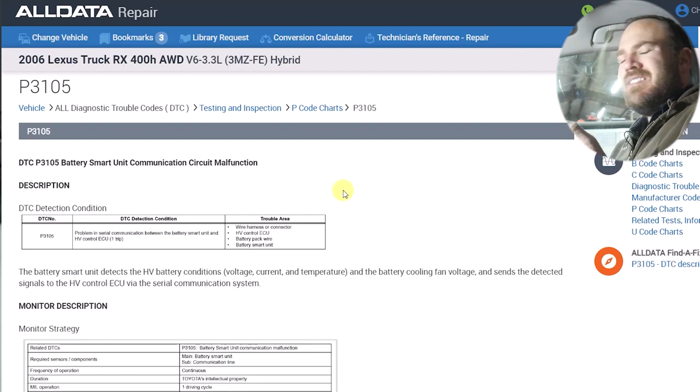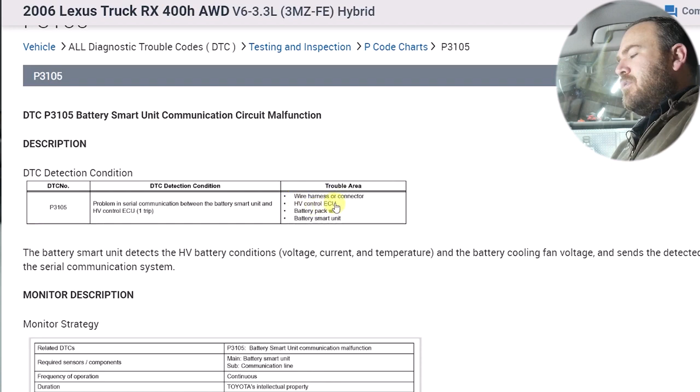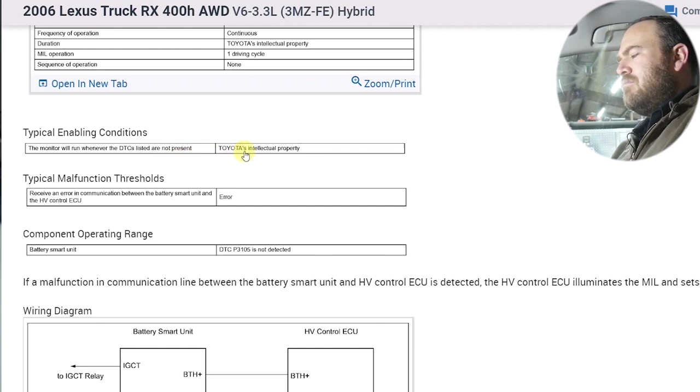So I have the 2006 Lexus RX400 pulled up on ALLDATA, and we're going to see what the code set criteria is and what the possibilities are. P3105: problem in serial communication between battery smart unit and high voltage control ECU. Trouble area: wiring harness or connector, HV control unit, battery pack wire, battery smart unit. Typical enabling conditions: the monitor will run whenever the DTCs are not present. And the rest of it's Toyota's intellectual property—they're not going to share that, even with their own technicians. So it's going to give us a quick

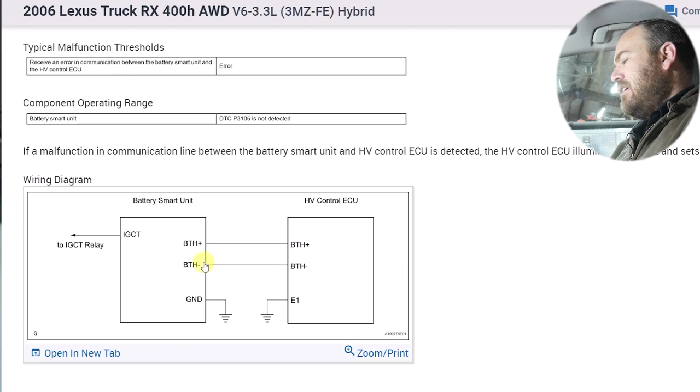rundown of the wiring, just a basic communication network here. And it looks like we do have a high and a low, so this is more like a CAN network and not just a single wire serial network or a K line. So we have BTH plus, BTH minus, and it goes from the battery smart unit to the HV control ECU. Now the HV control ECU is behind the glove box, so you can access that without getting close to the high voltage system. And then if you are working with the battery pack anyways, this battery smart unit is behind the seats.

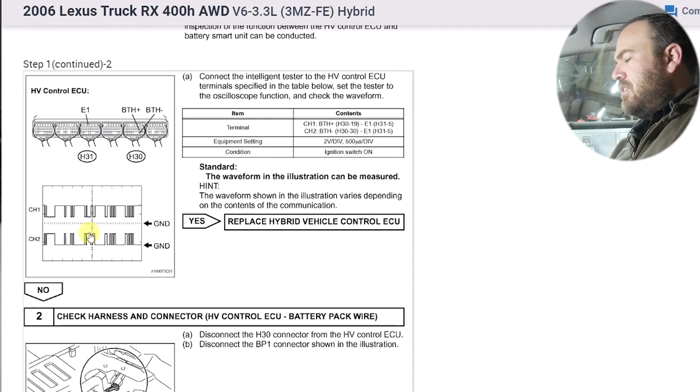So you're going to want to scope those communication lines and see if there's any issues. Now, they will show you here's the high voltage ECU behind the glove box, and they show you what the network should look like. Let's see if I can zoom in on that for us. So it looks like a typical CAN network. We have one switching high, one switching low.

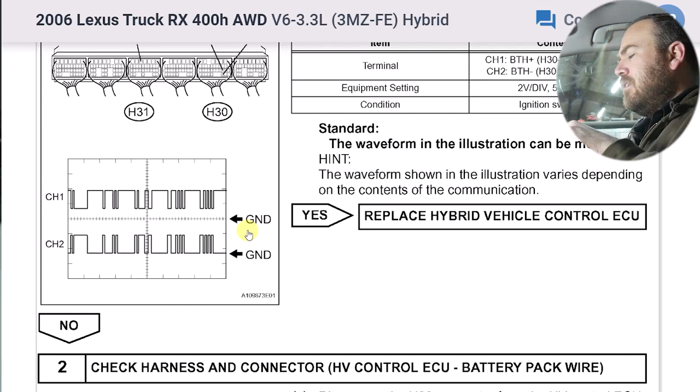I don't know what the bias is on this, if it starts at 2.5 and goes to half a volt, or if it's a 12 volt square wave. It doesn't really say, but it says that we should be at 2 volts per division and 500 microseconds on our lab scope.

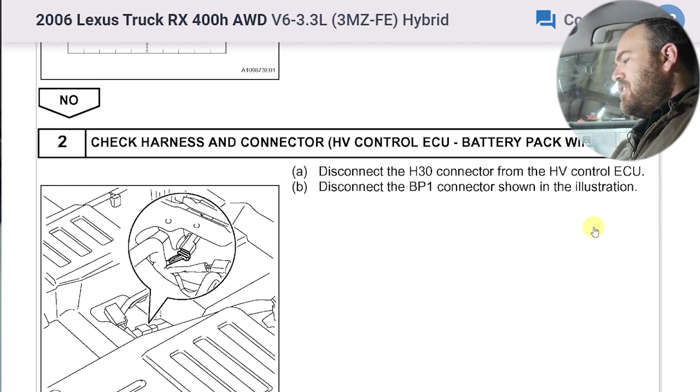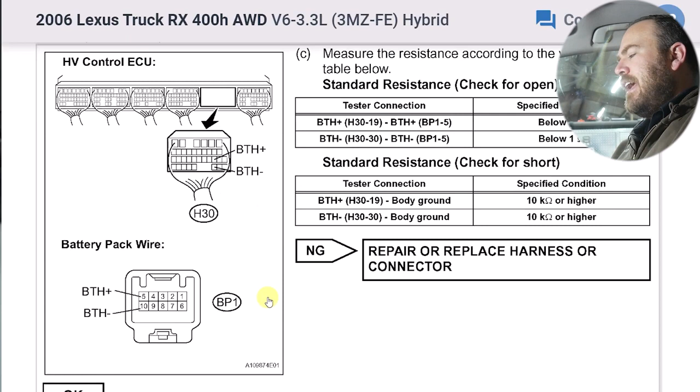So then it tells us that we should check the harness and connector to the HV control ECU to the battery pack wire. Disconnect those wires. Disconnect these wires so you can access even with the battery cover on at the back. And they want you to do resistance checks on those communication wires. And it goes on and on and on.

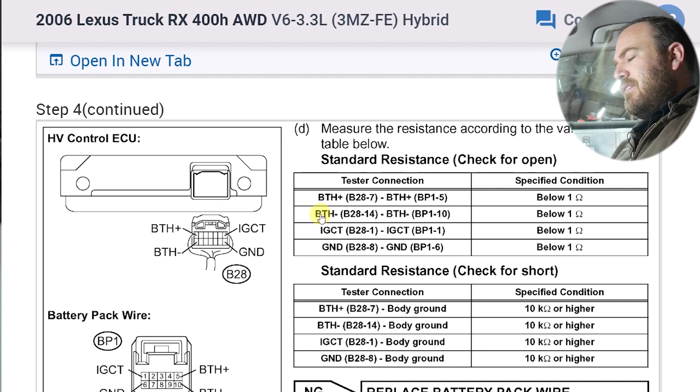Now, I did all this last time it was in here. Everything tested good. He didn't have a problem for 12,000 miles, and then it came back on again.

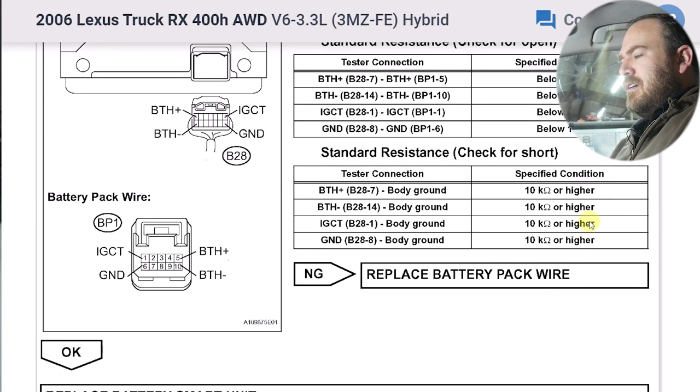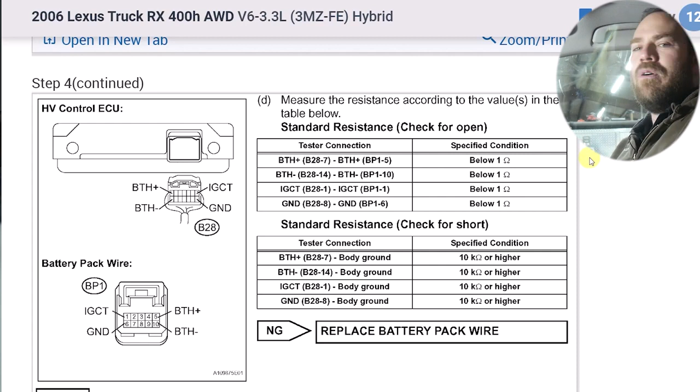So I started doing some more digging, doing some Googling, and I found a video from Diagnose Dan. And in that video he mentions a service bulletin. Now he's mentioning a service bulletin that's from DDTSB, which I believe is his own network of service bulletins. So I don't know if it's an official service bulletin or if it's one that he has created, kind of like on Identifix, how they have their Identifix articles.

I have checked this code on Identifix and nothing comes up. I've checked it on ProDemand and nothing comes up.

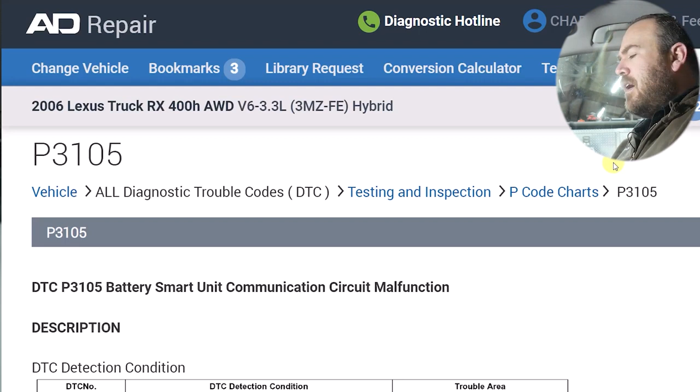And then I also saw a video from Super Mario Auto Diagnostic. Now he was pulling up service data from, he was working on a Toyota Highlander. His service data didn't look the same as my service data. So I pulled up a Highlander this morning. I looked up a 2006 Toyota Highlander hybrid. Exact same chassis, same power plant, just a different body.

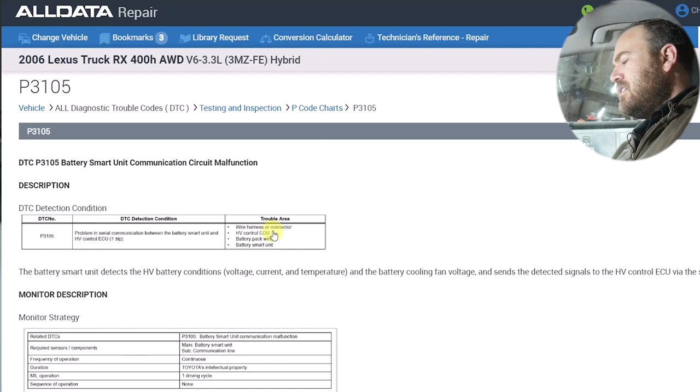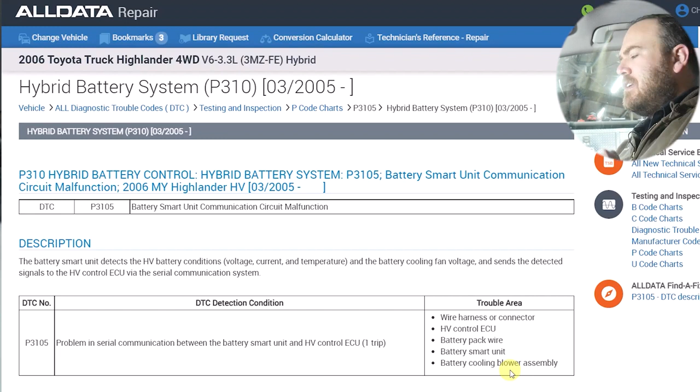This information is different. Let me go back to the top of this page. So we have wiring harness connector, high voltage control ECU, battery pack wire, battery smart unit. If we go to the Highlander, we have wiring harness connector, high voltage control, battery pack wire, battery smart unit, battery cooling blower assembly. Why would that be added to the Toyota one and not to the Lexus one?

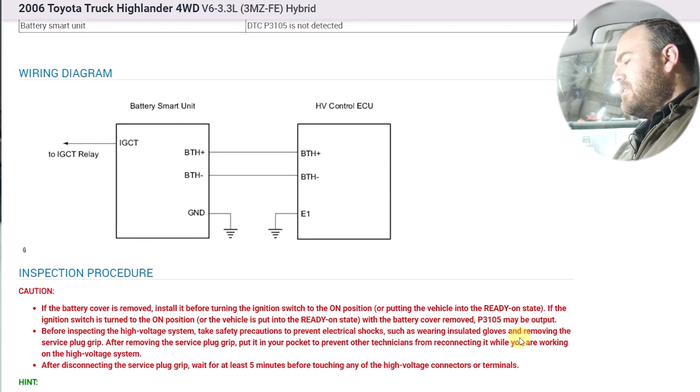Well, let's scroll down here a little bit. They give us, most of this is the same information. Step 1 on the Lexus is to inspect the control ECU and look at the network. Let's go back to the Highlander. Procedure 1, same thing. Look at the waveform.

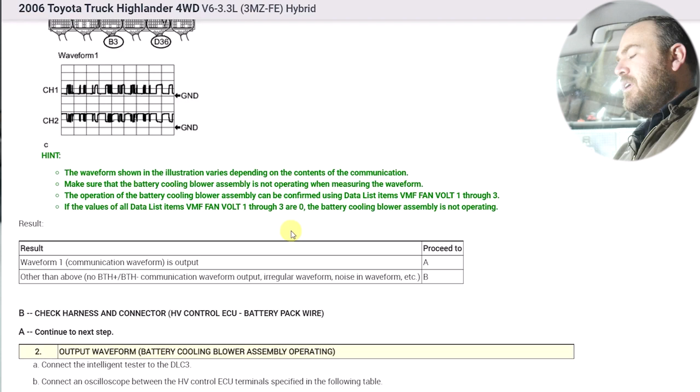And then there is a hint right here. The waveform shown in the illustration varies depending on the contents of communication. Make sure that the battery cooling blower assembly is not operating when measuring the waveform. The operation of the battery cooling assembly can be confirmed by using data list items VMF fan volt 1 through 3. If the values of all data items VMF fan volt 1 through 3 are 0, the battery cooling fan assemblies are not operating. So they want you to check for noise in that communication network with the fans turned off.

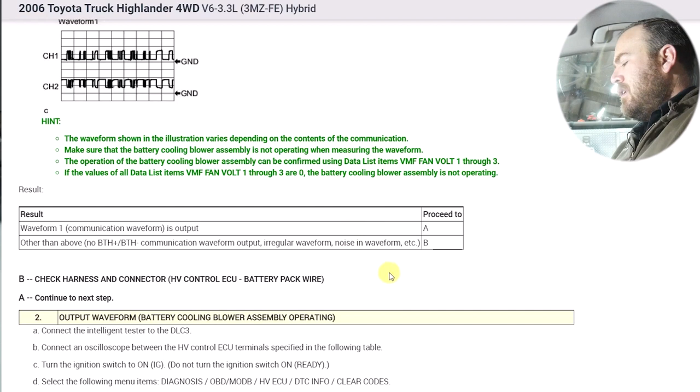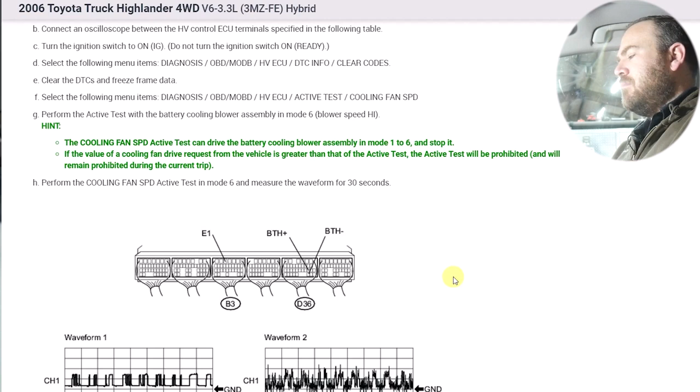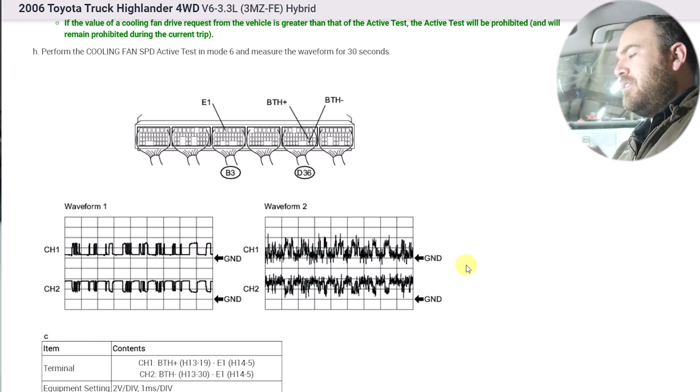Next step is to connect your service tool, and they want you to command the blower speed to maximum, mode number 6. Now that's not to be confused with OBD mode 6, they just want 6 because that's the highest it goes to on the scan tool. And we're going to do this here in a minute. They want you to look at waveform 1 or 2. If you end up with waveform 2, then likely your cooling fans are bad.

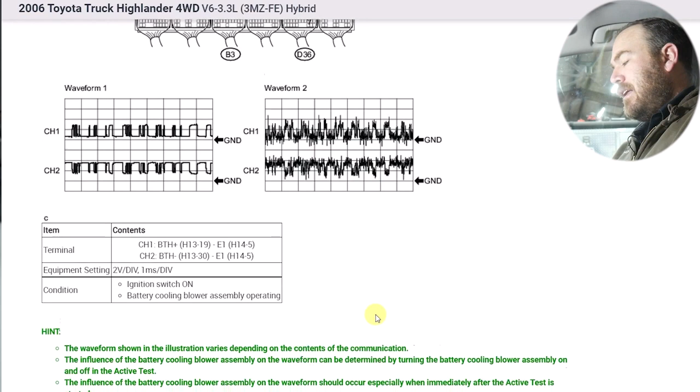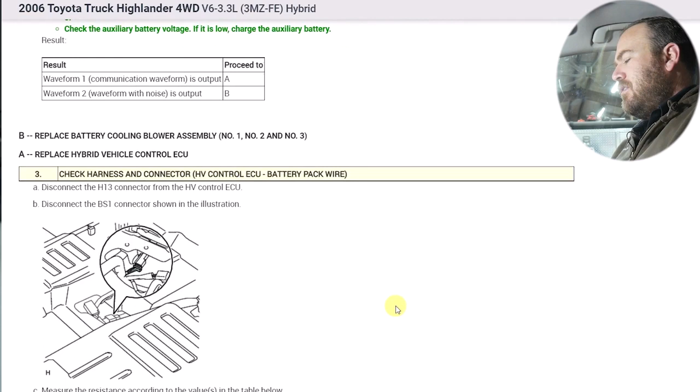Now, if I had this information the first time I looked at this vehicle, I could have potentially fixed it. And instead of sending the customer away and him driving for another 12,000 miles until it acted up again, we could have resolved the issue. We were already down to the battery pack. So I'm a little frustrated that the service information differs.

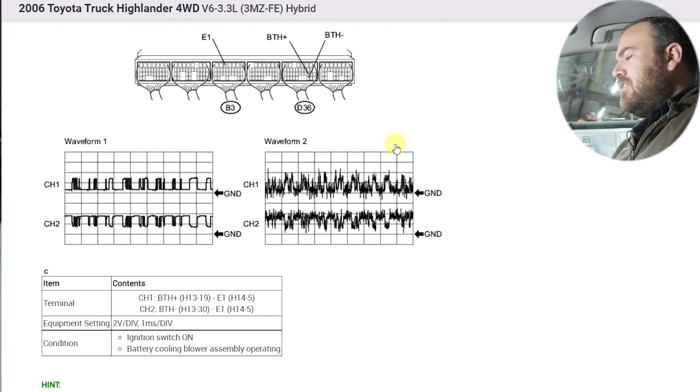So let's go ahead and do this. We are going to scope the communication lines. Now, since I already have the battery cover off, which I'm not going to show all that, there's a lot of safety aspects. You should be trained if you're working on the high voltage system in the back.

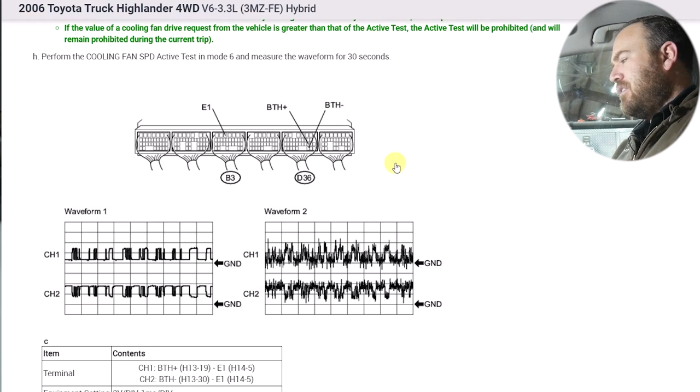I'm not saying that a DIY cannot do this job safely, but you've got to take a lot of precautions. You have to make sure that you're staying safe. Read all the information in the service manual pertaining to the job and how to do it safely. So let's go ahead and put the laptop down.

We are going to use the Launch Torque 5 today, I believe that's what this one is. This unit has an oscilloscope and multimeter built into the VCI. I have the VCI connected to the data link connector. It is wireless, so I plugged it in and it identified the vehicle.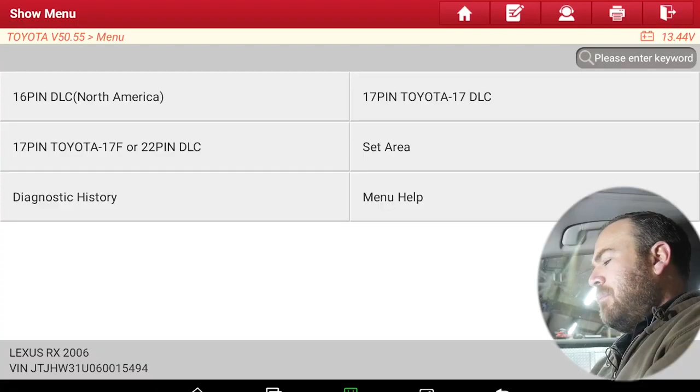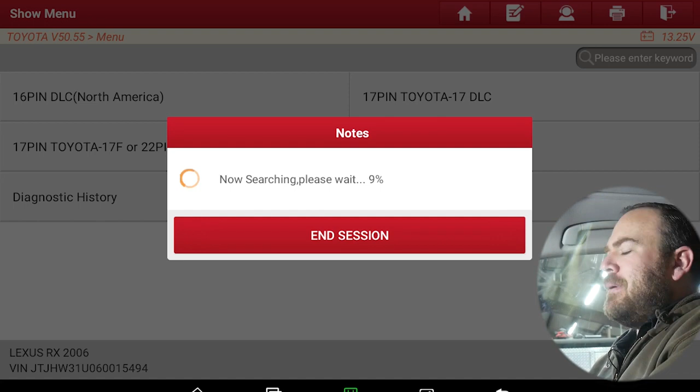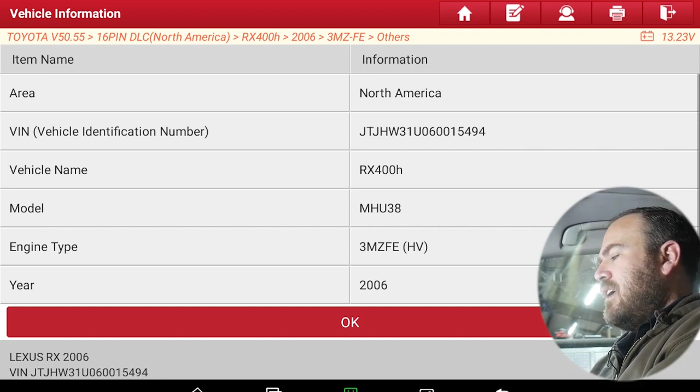We're going to go 16-pin DLC North America. If you're in a different region, on the screen there's a button called Set Area. You click that and pick the area that you're in. By default, these don't come shipped with USA or North America as the region. So the first time I used a Launch scan tool and couldn't communicate with a Toyota, I thought I had an issue, and it was just that I wasn't selected to North America.

So it has the topology screen. We show CAN 1 and our K line, so we have a serial network and a CAN network. Now that network for our battery observation module is not on this network. That is a direct communication from the high voltage ECU to the battery.

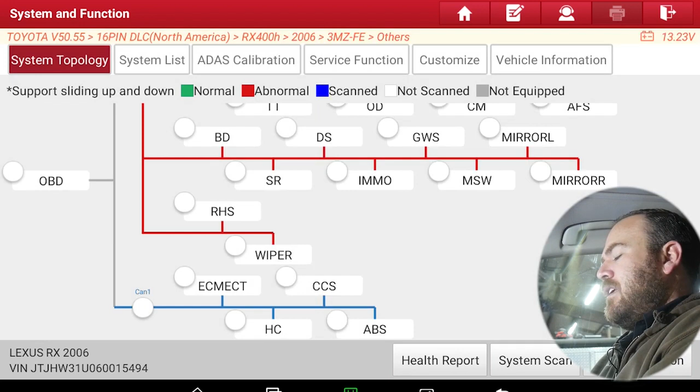Now I'm going to have a million codes in here. I'm just going to jump right into the hybrid controller, because that's where our testing is going to be for those cooling fans. And I do have the service plug out. I have the hybrid system disabled, but on this particular vehicle I can still communicate and command the fans on. And if you look at my voltage at the top, that's 13.24 - I do have a battery maintainer installed.

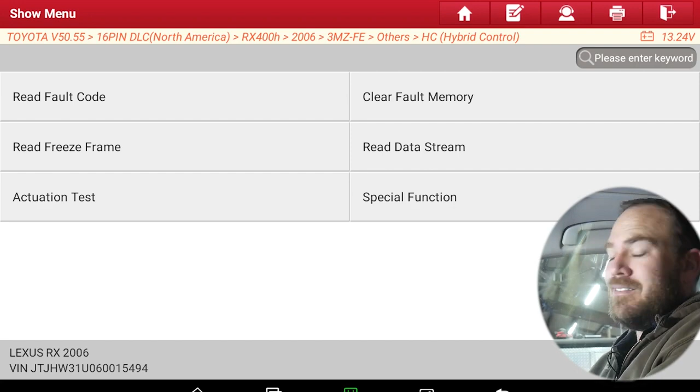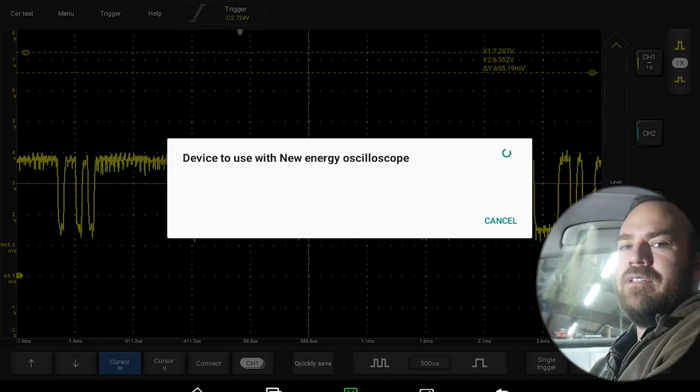So before I actuate this, let's go ahead and switch back to our lab scope and see what our signal looks like. On this unit, even if you're plugged into the data link connector and you want to use the lab scope wirelessly, there's a power button on the top. You hold that power button and wait for it to connect wirelessly. So that's what we're going to do.

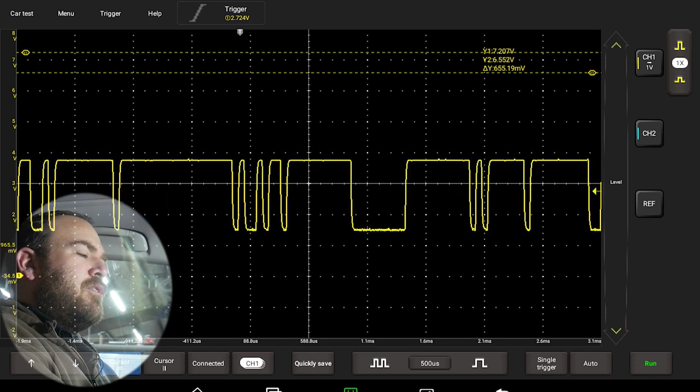I'm still new to this scan tool, so if I make mistakes in the operation it's just because, you know, I'm not an Android user and I'm new to the Launch lab scope. This lab scope seems more like a scientific lab scope to me in operation, more like what an electrical engineer would use based on the triggering and the setup. It's not quite what I'm used to using, so there's a bit of a learning curve. But you can do triggers, measurements, and all that.

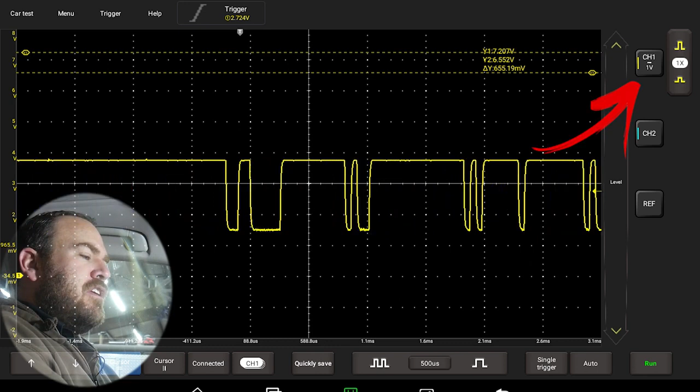So I have channel 1 on 1 volt per division. Now they wanted 2 volts, but it looks like we have an adequate waveform here at 1 volt. Now I'm going to turn on channel 2. We need to set that the same. And we have our CAN, or communication high and low, networks here.

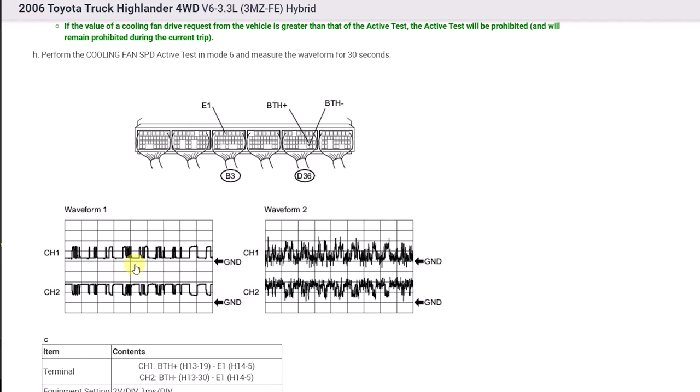Now they look pretty good. If we look back to our service information on the laptop, it looks pretty similar to what they have on waveform number 1. Now their images are a little smaller because they're using that 2 volt per division, and Toyota doesn't normally give the highest resolution images for their known good waveforms.

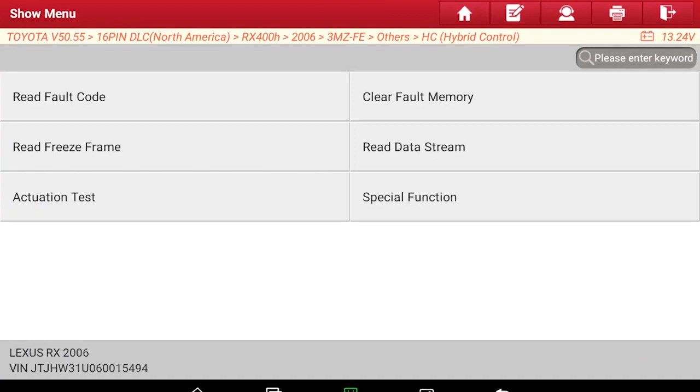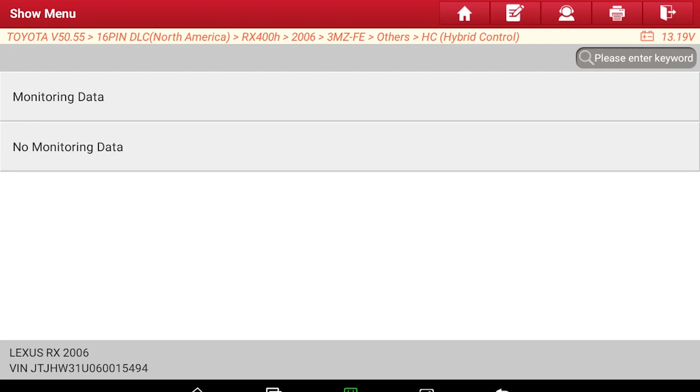So let's switch tabs here. We're going to go back to the Launch app for the scan tool. We're going to go to actuation test, drive the battery cooling fan. Now it said that we should go to test mode number 6, so we'll hit number 6.

We're going to switch back. And our waveform is getting pretty nasty. I can hear the fans ramping up in the back.

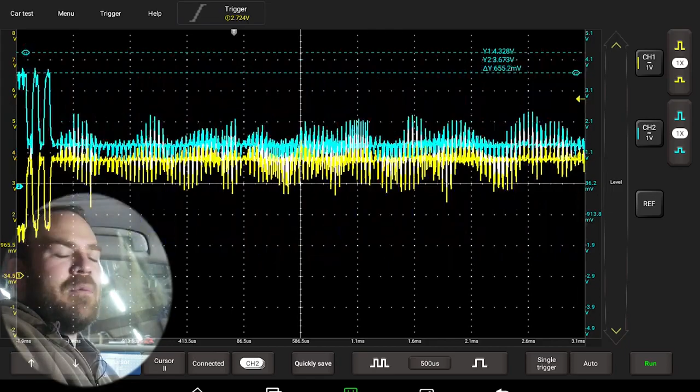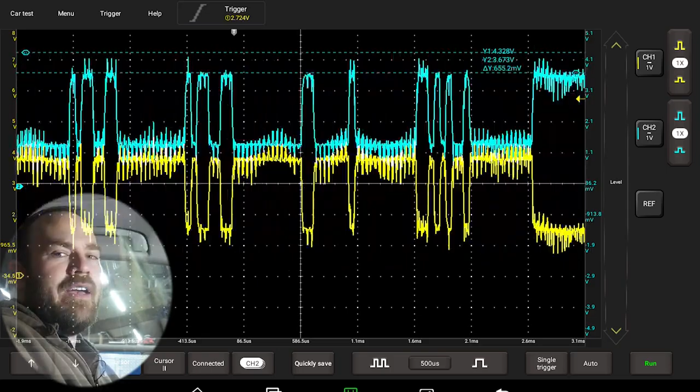That is a terrible, terrible waveform. Before I took this all apart, with the service plug still installed and without even monitoring this data, I could get the fault code to replicate just by commanding those cooling fans to number 6. That was my confirmation that this is the issue they're having, and that's why it's only doing it on the highway. They're under heavier load, running those batteries, and those cooling fans ramp up. Once they get to a certain level—maybe level 5, or if the fans run long enough, or they're pulling a hill and the fans ramp up to number 6—it kicks on and starts cooling that battery pack down, causing so much noise on this communication network that it causes the system to error, because this is a pretty nasty waveform.

So let's go ahead and switch tabs. I'm going to turn those off. Here's what I'm going to do: I'm going to plug in the new cooling fans, and then we're going to run this same test again and see what the difference is between the old fans and the new fans.

So I now have the new fans plugged in. Now I will tell you, if you're running the fans and you unplug one of them, it will shut all the fans down. You'll have to cycle the key after you plug a fan back in. If it sees a fan that's not working, it deactivates the whole system.

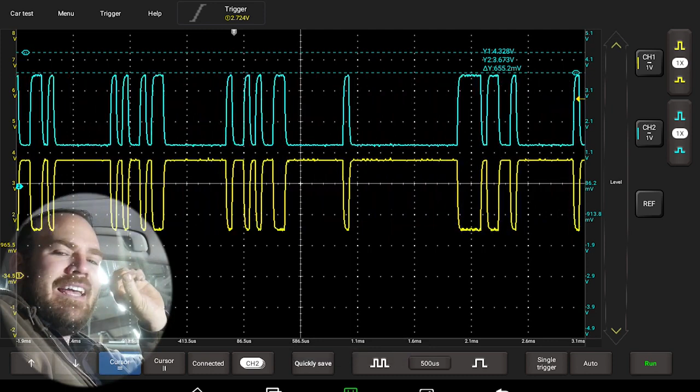So our signal looks good. Go to fan mode number 6. Go back to our communication lines—we see a tiny bit of noise. The fans are still ramping up. The nice thing is, I've noticed, if the fans stop running for some reason, you don't have to turn the actuation test on again. You can just cycle the key real quick and it'll re-enable the fans.

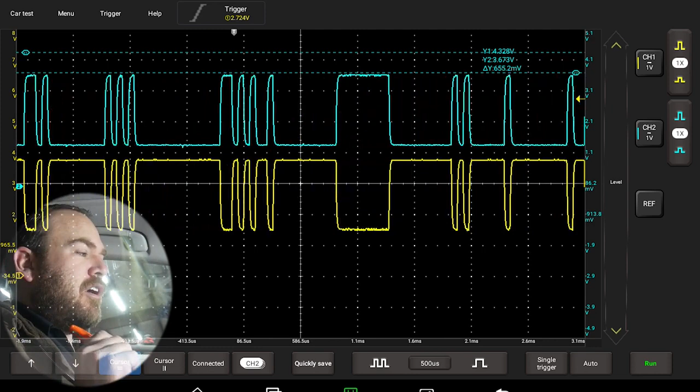So I can hear them ramping up. Now it is quite loud because I have the battery cover off. It sounds like a little tornado back there, a vacuum cleaner. But those fans are getting pretty loud—they're all the way on high speed now, and our communication network looks great.

Let's go ahead and shut those off. Now, last night I spent quite a bit of time with the amp clamp and voltage readings, going through these fans, looking at them. They are a 4-wire fan. They have a power, a ground, a command signal, and a monitor signal. The command signal comes from the battery smart unit, and the monitor signal actually goes all the way up to the high voltage ECU behind the glove box, or the hybrid control unit.

I didn't see any abnormal signals, and I didn't see any signals that were different from one fan to the other. All of the fans had very, very noisy power signals and very noisy ground signals. Now, the new fans do not. So I don't know if the old fans were just pulling so much current that they were overloading the battery ECU.

They have a common ground, a common power source, and then there are 3 different command lines coming from that computer to command those fans on. Now, I don't know under normal circumstances if the controller will run each fan at a different rate depending on if that battery pack the fan is cooling has a higher temperature. The center battery pack is quite small—about half the size of the 2 outer packs—but it has the same size fan. It does have a smaller inlet though. So maybe they just ramp them all up together and turn them all down together, but they also may do independent control. There's not a lot of information in the service manual.